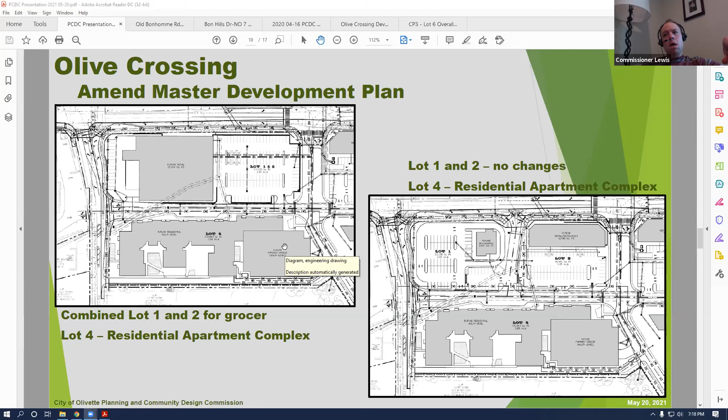Thank you, Carlos. I'm curious, obviously this was a year ago when we discussed this, but I thought the office building initially had a grocer at the bottom, and then it got modified away from grocer to just office building, if I'm correct. I want to validate that. Second, I'm curious how far the process has gone with the neighbors, because one of the concerns people had before was views into yards and things like that. One argument was that since it's an office building, people aren't there at night, but now if it's residential, that changes. I'm also curious whether this revisits some of the traffic concerns that existed before.

I don't know if it's better or worse, to be honest, with people now maybe leaving in the morning, coming back at night, versus the flip of that. So maybe it's six and a half dozen, but it impacts the weekends more. Sorry, I have a litany of questions there.

No, all good. If I can summarize: one was the original components of lot 4 did include the potential for a commercial component on that lower level. It was illustrated, as posted on the screen, that they would continue to seek if on that lower level they could secure a grocer, and that within that configuration there would be that flexibility. So you are correct, it wasn't that there would be two different options, but that within that original plan there would be enough flexibility to incorporate a grocer if the developer could pursue one.

The second is discussions with the neighbors regarding the change in use, the office building being somewhat limited from daylight times, to residential now having a more expanded timeframe. I'll let the developer address that aspect. For us, that's what this current process is about. Notifications have been sent out, and we are having our first meeting or discussion.

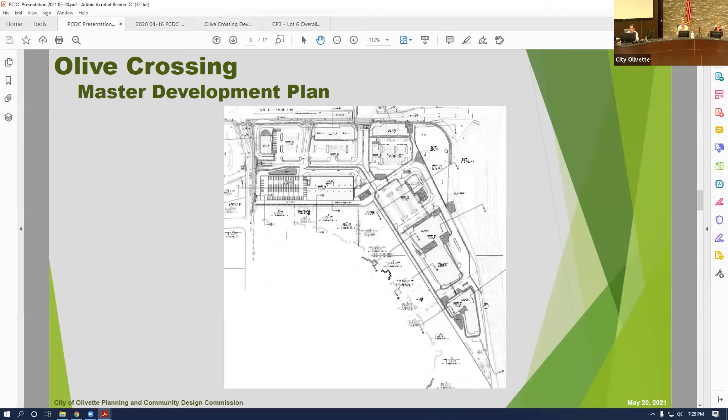This is part of the process as we learn through the PDD and the master development plan review. The footprint configuration of the buildings has changed from those in the original approval, but that's not necessarily inconsistent with the master plan.

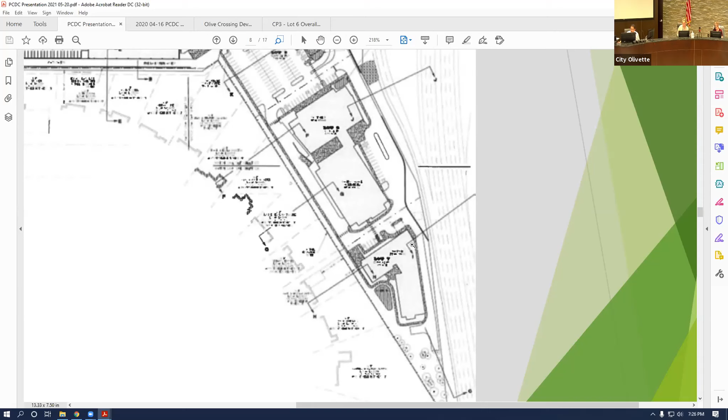These were meant to identify and illustrate the potential building masses, heights, and footprints. Lot 7, the hotel complex, had two components with two tenants, a southern and a northern area. The building in lot 6 had a drive-through that was removed, and the office building and parking structure were shifted northward in the revised plan.

Is the parking structure changing in height or size? It looks like it's getting wider. It probably is getting wider in footprint, yes. Is that because of the loss of parking in front along this area, as some of the public spaces got redefined? Yes.

Has there been any other changes related to the public spaces? Yes, we'll see those when the petitioner presents. They're more three-dimensional, with vignettes to articulate what those spaces are. The adopting ordinance designated these areas as enhanced public spaces, but the vignettes themselves were not incorporated into the ordinance.

If there are no other questions or comments at this time, I think we should bring on the developer.

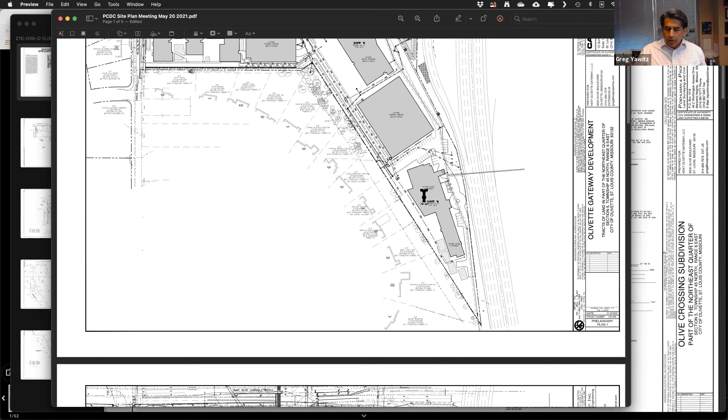So to keep with that, we held that. But really, to focus on the more significant change, I think, which is the residential building. Some of the questions I heard talk about the view and the massing.

And the use. On the use, yes, we had originally contemplated this potentially for retail on the first floor. It's not going to work out that way. It's not ideal for retail that far back.

But what we've done in the creation of this plan, which we'll be bringing forward after this next step, first will be the Lot 4 plan, is address things we heard from the Planning Commission in years past that they thought we should change. Number one, the garage used to be on the Price Road side. There was feedback, I think from Mr. Saunders, that it would really be better design-wise if that garage was flipped to the internal side. So you see that's been done. That's the box right here.

The other thing we're able to do, even though we have residential next to residential, is cut the building up. And if you see this inverted E shape, that gives us the ability to honor the request that this particular building be no closer than 30 feet. While this leg and this leg are 30, everything else is significantly farther away.

So we pulled the building away from the residence, which I can show you in a rendering in a second. Also recall that the elevation, the first floor elevation of this building, in this courtyard for example, is upwards of 12 feet below the property line here. And on top of that property line, we've already agreed to add an 8-foot fence.

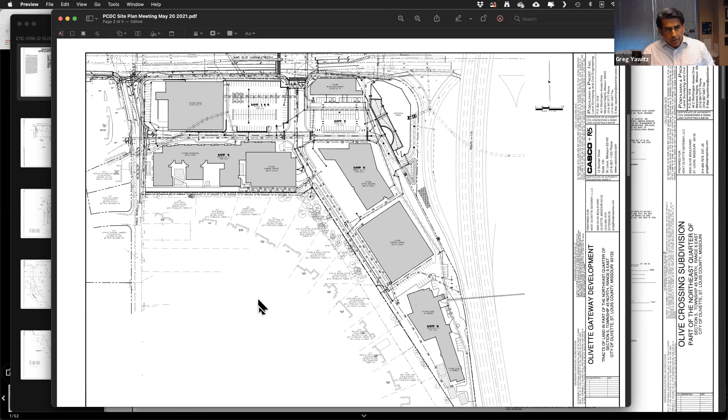The parking garage, what we're doing there is adding about an extra 50 spaces over the minimum required for the apartment building, so that it all contains within our height restriction, giving us that communal parking for the development. So if we get the steakhouse we're hoping to get on the end cap of this office building, you could have valet parking, with valets running cars into the garage instead of overtaking the surface lots.

Heights. Currently our height limit on lot 4 is 64 feet. Based on where we are in schematic design, it'll be below that. I can't tell you the exact height yet, but I can guarantee it will be 64 feet or less. We've done preliminary work on the hotel height too, and I believe we'll come in 6 to 8 feet below that height, but we haven't had the architects design it yet since we're not ready to build it. So I'm not 100% sure where that'll be, other than 100% sure it'll be 64 feet or less.

What else did I see? Oh, let's talk about public spaces. We are in the midst of refining public spaces as we can. Let me zoom in here.

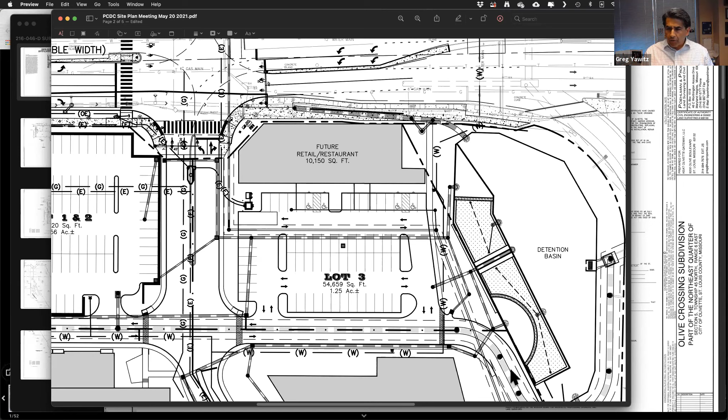I'm going to show you in a minute a graphical 3D representation of this very large public space area, which connects us to the Centennial Greenway, where we'll have a row of fountains set into our detention system for a visual, aesthetic element, along with a series of concrete benches and trees, not yet specifically designed until we do lot 3. I envision this area as a place for public outdoor gatherings and concerts.

As we refine lot 4, which I hope to bring you in the next couple of weeks, we're looking at this concept of nodes, where neighbors can stop while walking and talk. We're trying to come up with a very cool, functional area to possibly sit and congregate around the entry to the apartment building, a rendering which I can show you.

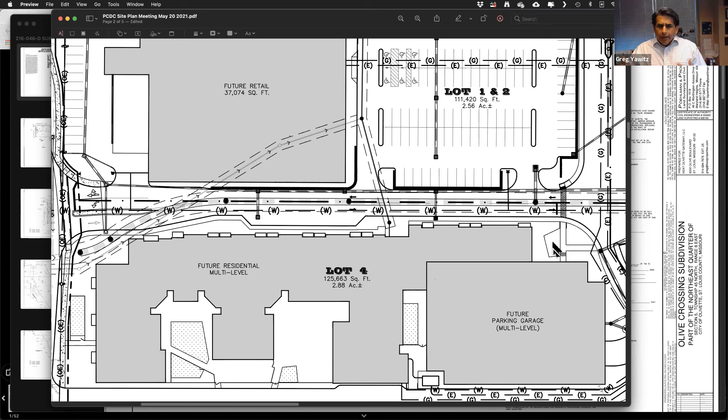This is all green space on the west side, including a dog park. And then this node in this area gets changed. This was going to be a walkway straight into the garage, but due to the grades, it's actually going to come in on the side, and we're going to create some sort of feature here. Again, people can stop and talk, there'll be benches, decorative lighting, things like that.

Again, we haven't fully refined the site plan for every one of the lots. Right now we're focusing on the conceptual master plan for tonight and the plat while we finish the refinement of the design of lot 4.

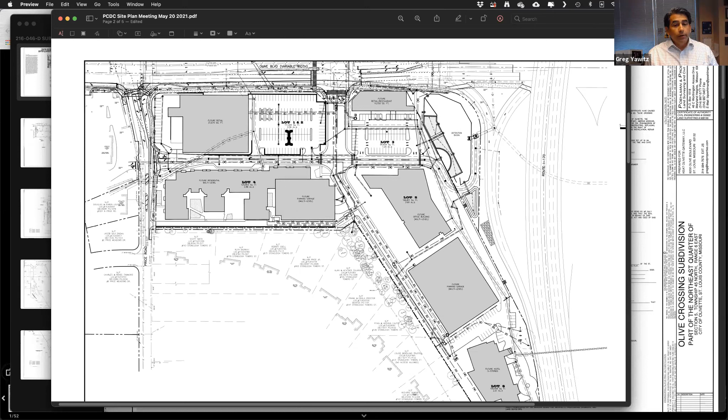I'll stop there. Roughly speaking, if you walked within the development without doubling back in any one spot, we will be over a mile of sidewalk, if my calculations are correct, within the development. That includes the sidewalk along Olive, which will be 12 feet wide from the east end of our project to Hilltop, and 8 feet wide from Hilltop to Price.

Last thing, since new things have been happening every day, we are changing the road name on the south. It's currently Collingwood, and we're going to make it Hilltop all the way down and through and straight back. Then the east-west road that runs around and in front of the office building will be Olive Crossing. That was approved and addressed by the county last week.

So with that, before I get to renderings, I'd love to answer any questions if you have any.

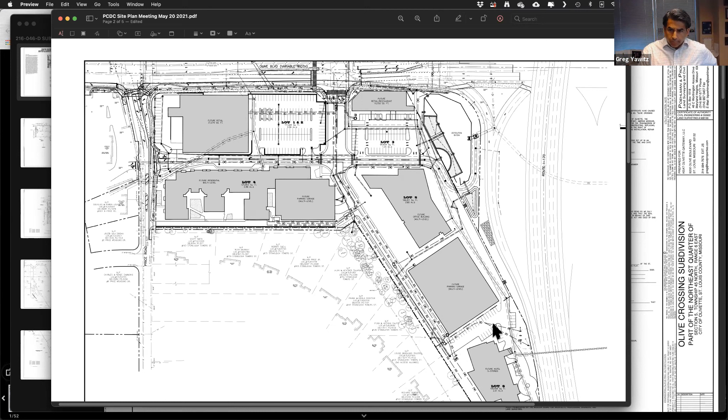I think we should probably see the renderings as well, and then get a better feel.

I am curious about those businesses you actually have secured already. I thought the hotel was one. If you can tell us if there's any others you can share without leaking anything.

Sure. So other than the hotel, the answer is no. Let's go back to the difference between here and here, right? I have someone who has a very firm offer that I have not signed for this. The reason I have not signed the offer for this is because I want this.

This will not surprise you. This looks a lot like a building that would house a business that predominantly sells food, like a grocery store. So as much as I really like the food these people sell, I think our community would rather have this use. So I'm dragging my feet because I'm trying to lock one of these down, because that's the direction I've heard for 20 years in Olivette - we've got to get a grocery back, and I take it as my personal mission to try to do that. If all else fails, I feel like this is a good option. Whether this building ends up this big or slightly smaller, I told my civil engineer to make it as big as you think is logical for this site.

As it relates to the hotel, my partner and I are actually the franchisee. So it's a 160 room dual brand Marriott - 80 rooms of Marriott Courtyard and 80 rooms of Element by Westin, which we will combine. There'll be 2 lobbies. Let me scroll down here.

So the building will be entered - there are things I do know. This is the Courtyard canopy and entry, and this is the Element entry. The hotel rooms are in the straight up and down part, this whole section over here.

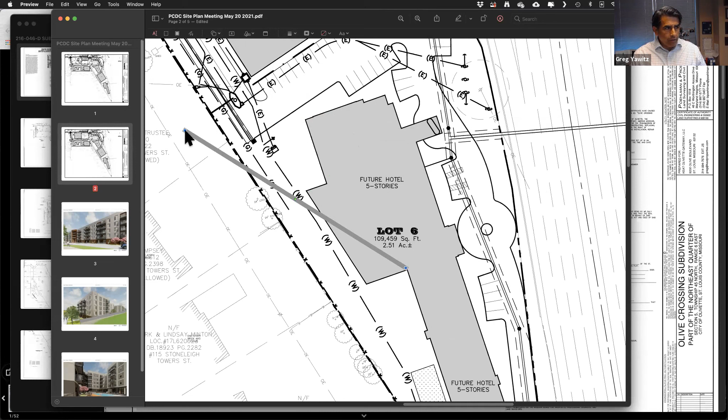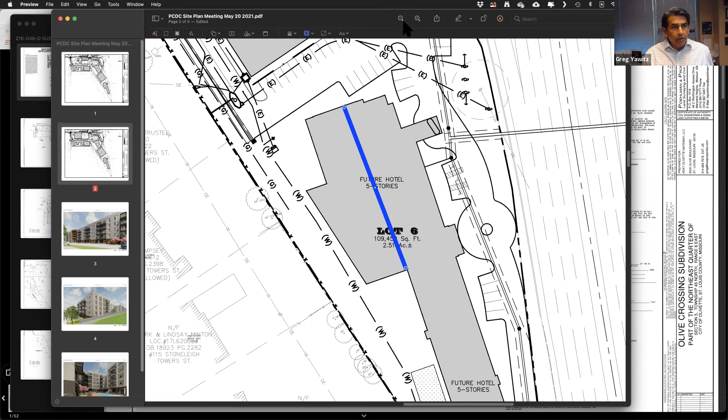Just to give you an understanding, everything roughly to the left of this line - let me make it a better color - everything here is one story. The rooms are all in the main wing. We are signed franchisees, and Marriott's request, among others, is that we not open the hotel until the office building is closed in and the parking garage is built. They don't want customers driving past construction and risking popping tires. Does that answer the question?

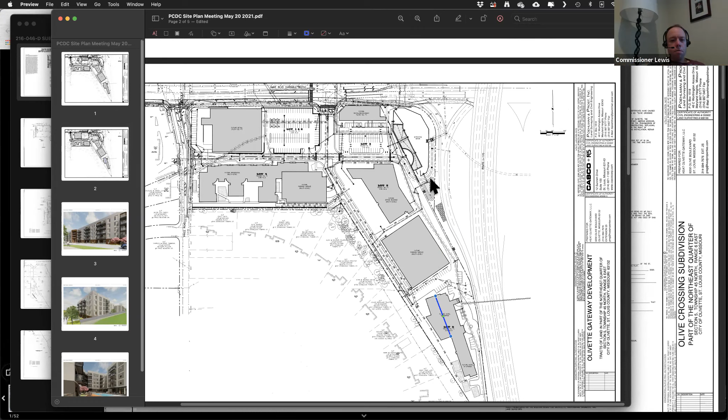Yep, thank you, perfect. All right, so first I want to show you where we currently are in the progress of the look of the apartment building. We're still working on a name right now - I think the marketing team has called it The Res at Olive Crossing.

I just want to give you a feel of what we're looking for here - I don't want to call it flash, I want to call it definition. I want to call it presence, sense of place. You know where the entry to this building is.

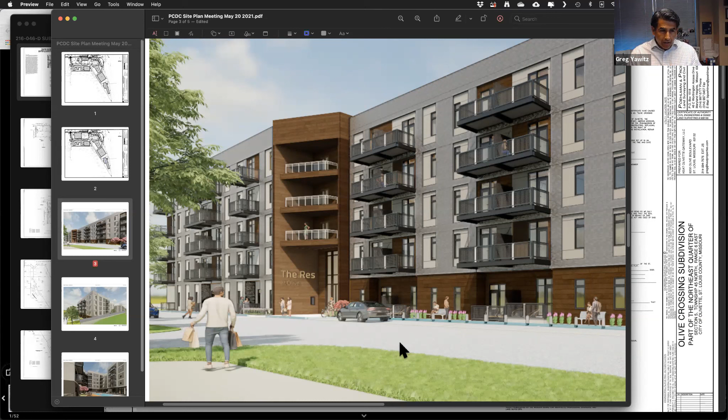So we're talking about a mix of materials, all of which I believe are permitted by code. This wood look material is a Nichiha panel, and we're still playing with it - we probably have 8 different versions. We're trying to settle on one, which I'll have by the time I present it to you. But giving the building a very calming feel, a big sense of place, so I'm not confused when I pull up to this building where I enter and where the lobbies are inside. And then as you can see on the front, we'll have balconies.

Let me zoom out here. Here's a view - oops, Bob left these on. My architect just sent me these. These balconies are gone, I don't know why he sent these to me, but I just got these an hour ago because we're playing with different models. Imagine these are gone, because they will be.

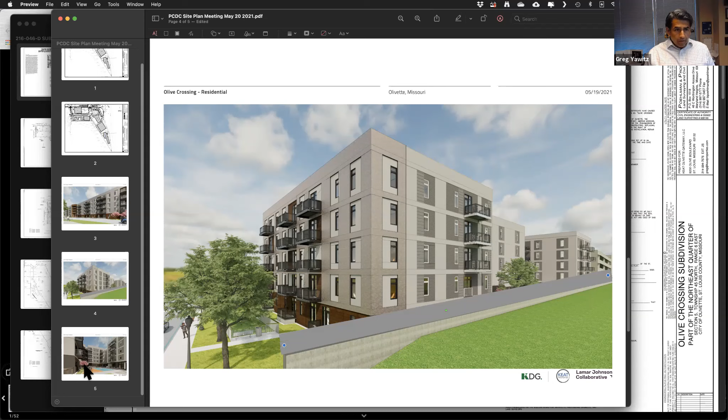But here's a side view, and he didn't draw this in - I'll try to give you a feel for it. This is the retaining wall where the elevation of the building drops, and on top of that retaining wall will be the 8 feet. I don't have a scalable drawing to add it, but for reference, we still plan to honor that requirement and agreement with the neighbors where the code allows 6 feet, but we're going to go to 8 feet. Again, this keeps anybody from seeing anything going on the first or second floor of the building. And then just to give you a feel of where our current concept is for the courtyard space.

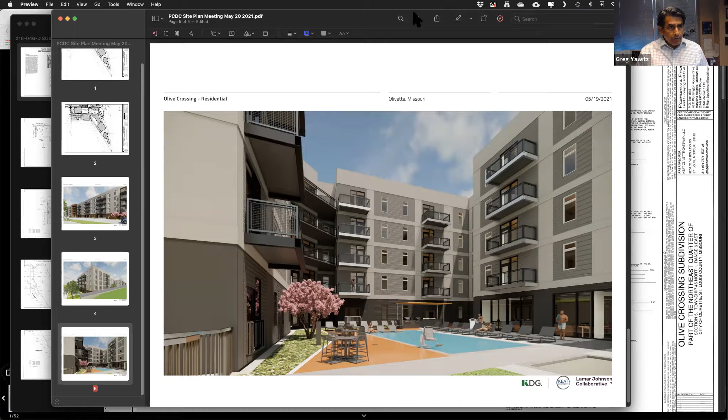Let me show you something else.

Now, what you'll notice when I show you is that the colors of the residential building are different, because what I just showed you is newer than what was done a few weeks ago.

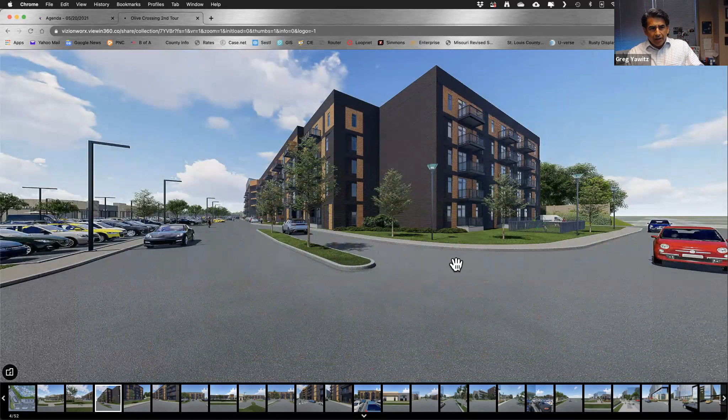So this is the site plan. The hotel's up at the top, it's inverted. The grades aren't fully accurate to scale yet because we're still finishing some of the civil design for the building, but this will give you a feel for the 3D world.

Sidewalks on both sides of the street, clean lines, rich looking materials, decorative lighting fixtures.

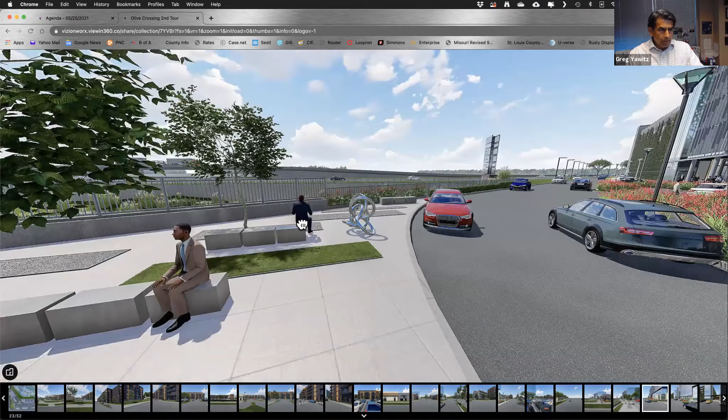And then when it comes to the public space, this is the concept we're going with. We've got this railing here, which will have the fountain behind it, but then a place for people to congregate, sit, bring their lunch if they work in the office building, outdoor live music, things like that.

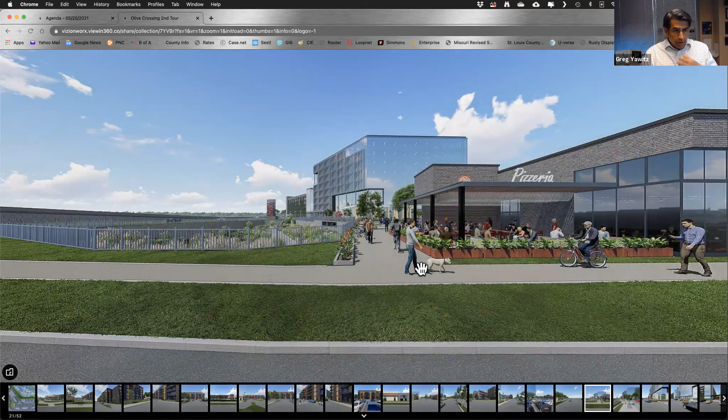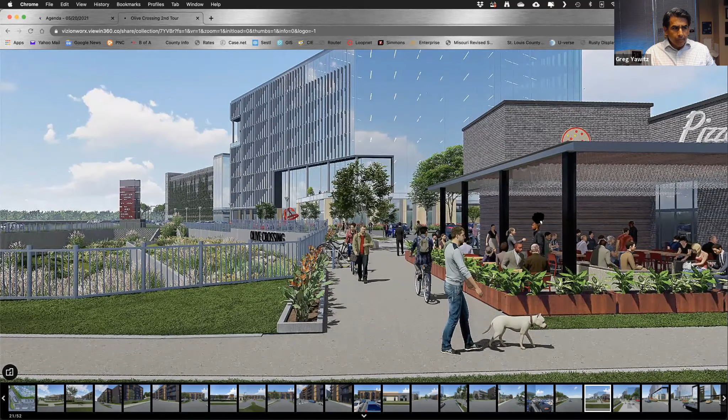Give you another view from here. As I mentioned, we connect to the Centennial Greenway, so we've created an extra wide path in, and we're concepting a whole bank of bike racks, outdoor dining, the canopy concept for outdoor dining at the restaurant — again, haven't set the materials. This is the concept on this retail building on the front.

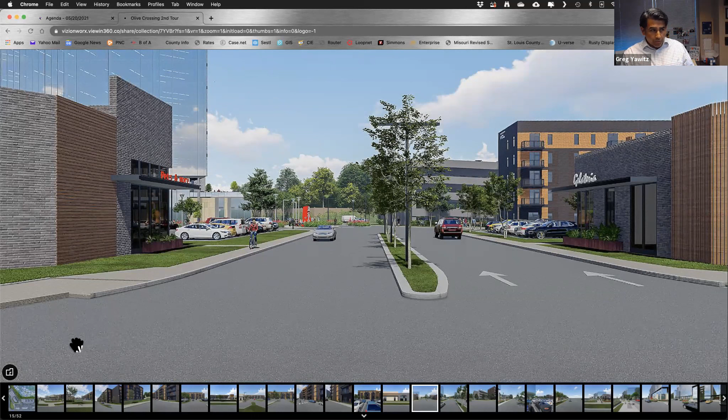Let's see. Just a look as you drive into the development, just trying to evolve this as we go. Some of these colors and images are upwards of 3 years old. We just haven't gotten to each one of the lots yet.

But really, if you trace where my hand's moving, the length of this sidewalk brings you all the way around the property. We've tried to minimize the crossings so you can get from one side to the other.

If you come down Price, for example, you can walk all the way across here, cross once, then cross a second time, and now you're all the way either in the public space or you can get on the Centennial Greenway. So we're trying to be as thoughtful as possible about minimizing pedestrian crossings.

Over the years, for those who've been on for a while, if you remember, the intersection here was never really that clean. We've cleaned all that up, just trying to make things sensible.

As a reminder, the road behind the residential building is for Ameren to service the power lines on top of the hill, but it's one way out only. So we will not be taking traffic in here. This will be an exit only that may be gated off and required to be manually opened.

And then I want to show you — so I mentioned the steakhouse concept. What we're talking about with the office building is creating a space for restaurants and outdoor seating and outdoor gathering, above and beyond what you might normally see.

Again, haven't fully refined it. Potential for outdoor seating, for a cafeteria, for the office tenant up on the second floor here. We're looking at things like green roofing options. We're just, as we go, we'll develop the specifics.

So yeah, I think hopefully that answers the questions about public spaces. And as we develop these two lots, depending on how that ends up shaking out, we'll do that.

The lot 5 is pretty thought out — this big public space here, some space along the north side, a large public space and walkways here, and then the connectivity within the sidewalks.

Can you show us some of the views of the — oh, behind that potential food retail. You mean here? No, go to the northwest. Here. Right. Yeah. Oh, so if this was the plan versus the grocer?

Right. Oh, I thought you had the grocery store already included. No, we haven't 3D modeled that yet because I don't have anybody locked in to model it. I'm trying to actually do that as we speak. I may have a new model for that in the 3D in about 2 weeks based on some stuff that happened yesterday. So in this case, you would just see the building move farther to the east to allow for the trucks to get in, which we would screen, and the retail building would actually face east toward the entry.

The only concern I'd have is, usually the back of these stores are never kept up real clean or nice, and that's kind of a main focal point right at that main intersection. So I'm just curious how you're proposing to address that.

So how we'd address that — let me go back and show you, hold on. Let me go back to... where the hell's the PDF? Hold on, let me find it.

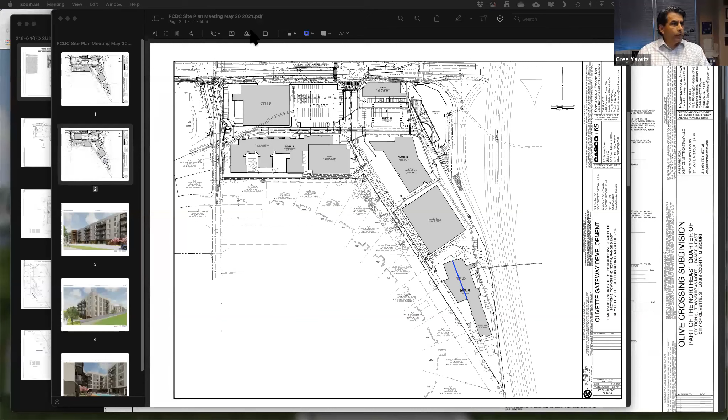So in the event this were the configuration, from about here - this entire line would be heavily screened. The elevation of this area would be below the sidewalk, estimated to be upwards of 5 feet below grade, and we'll screen the entire perimeter because you have to get deliveries.

I don't think we want deliveries facing the apartment building, and I don't think we want deliveries facing Olive. We can hide them a lot better in this area with fencing and screening between the sidewalk and the paved area. So that's our plan. Once I have a user, which I hopefully will have soon, we'll design it and submit it for your consideration at that time.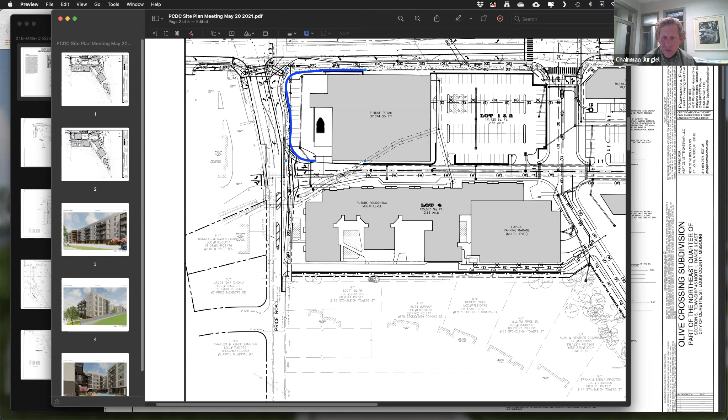Well, I am concerned about that, and I'm sure other commission members might have some other questions. Or do you have any more visual items, photos or renderings that you want to go through?

I think I covered - let's see if there was anything else. I showed you the 3 slides of the apartment, the 2 site plans, the 3D. I want to give you a feel on the 3D on something. Hold on, here we go.

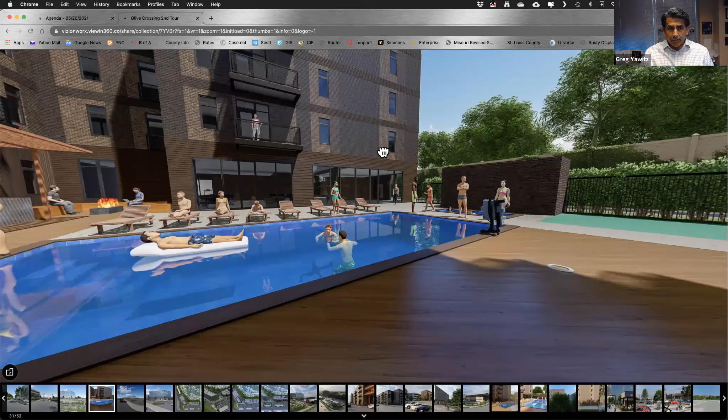So the way we've thought about the courtyard area - besides my earlier reference to a 6-foot tall person and the top of the wall being 20 feet - is we're placing a barrier of some probably brick structure between the pool. So you have the pool, the hot tub, and then what amounts to really a sound wall. It's tough because this is all digital, and this is not as high as it should be - this fence will actually be up here.

We are so far below the neighbors, and the homes are upwards of 150 feet from the property line that, laws of physics, sound can't go up, over, and around a fence. So we're going to be containing our activity below the grade, 150 feet or more away from our neighbors, and have instituted what will actually also be an impervious-to-sound surface aside from the 12-foot retaining wall and the 8-foot fence. So I just wanted to give you a sense that we're trying to be as thoughtful as we can with our neighbors about as many pieces of this design as possible.

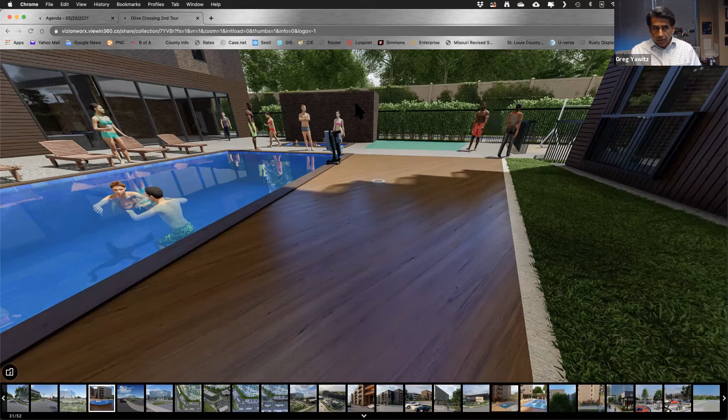And so that's why we chose to locate this here. So now I'm happy to answer any questions. Does anybody on commission have any questions or comments for Greg?

I got a couple, and I'll go ahead and start off. Do you have any new cross sections that show the view from the residents for this apartment building, just to get an idea of the impact of it?

Well, hold on, I think I might in my stills section. Hold on, I think. Yeah, okay, let me reshare again.

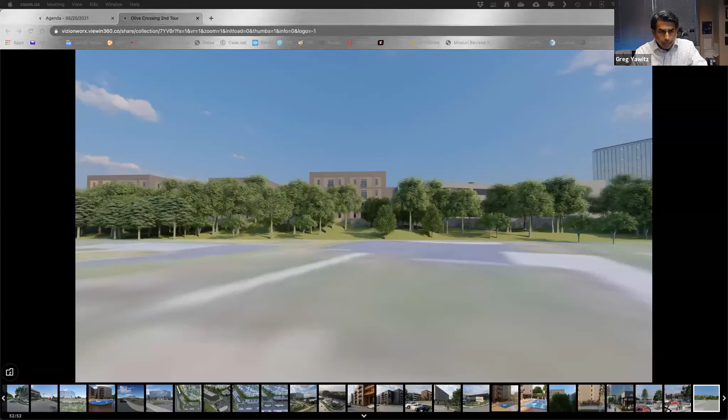All right, so Andre, my 3D guy, has taken the topography from the available USGS maps. I can only zoom in so far, and he couldn't really render the people's houses, so he just took the grades.

But what you see is most all the neighbors from Stony Side have a dense tree canopy on their northern side, which sits between their homes and the building. So what you'll see are broken up sections. If you're in their backyard, first of all, you have to look over an 8-foot fence, so they're going to have to look up at any part of the building, unless they are on a second floor of a home.

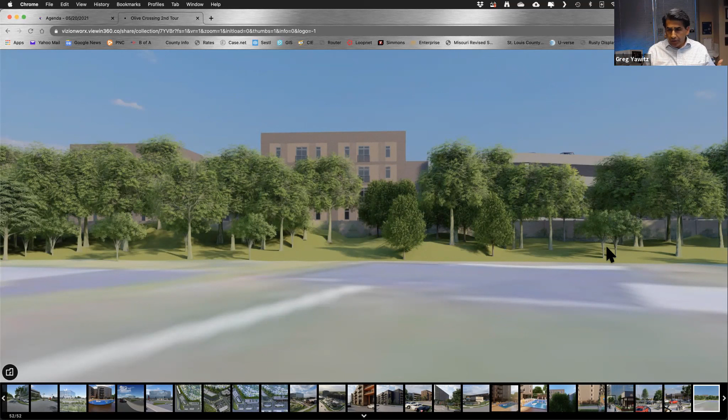And I have that with my neighbors - I have a second floor of my house. My neighbor's house actually sits 8 feet lower than mine, and so I can see over the top of their house. So this is an extra floor or two above that. But again, we're minimizing it so that there are windows, and we're eliminating balconies on the south side for that specific reason.

Where would the houses be approximately - is that what the gray spots are? Yeah, exactly, this is the footprint of a house. So we're looking really through at one point, so we're kind of at the front yard. Yeah, I'd say you're about the front of a house.

Could you zoom in to get back to where the back of the yard would be? This is as far as the zoom lets me go - I'm scrolling my mouse and it's not moving any farther.

I mean, I can show you here. Let me go back to this. So, just to give you an idea, everything's going on here. You're looking at blocks about a story and a half at grade.

But when we bring in this specific building for review, I'll bring in cross sections once we've got the height set, laid out relative to the distance to the back doors, standard 6-foot height person, things like that. I'm also not an acoustics engineer, but I'm wondering about the potential echoing effect with that apartment building and the walls.

Well, and I think you addressed it, but I think it'll be interesting to hear from the neighbors. It does change things now that it's a weekend activity when people are out in the pool during the day and there's noise. I don't know acoustics well enough to know if 150 feet and a wall can carry sound or not, but I'd be curious if the city can look at anything like that.

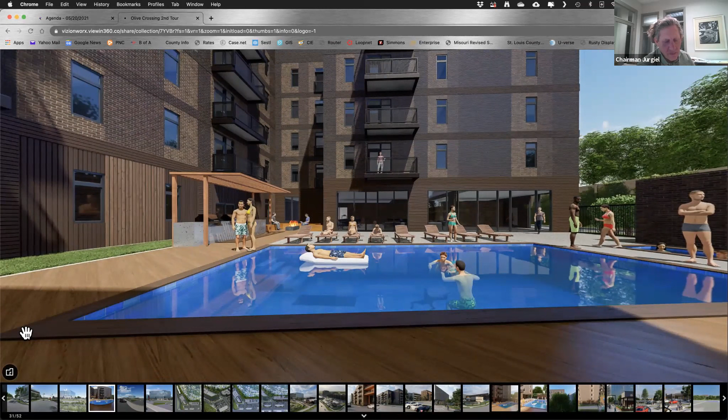Can you pull up the view of the backside of that apartment building? I guess the southern view of it. I'd love to see an elevation view of that building, so I can see what the parking garage is going to look like as well. Oh, all right, so the parking garage, let's go over here.

So it's a precast garage, probably 4 levels, all grade and up. It'll have interior bike racks. We're going to have multi-port electric charging stations, things like that.

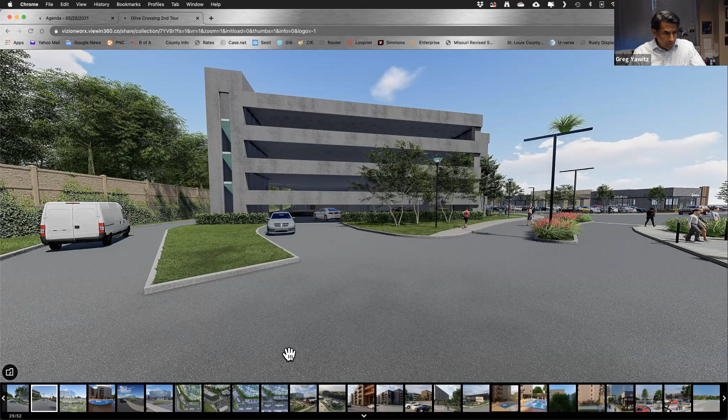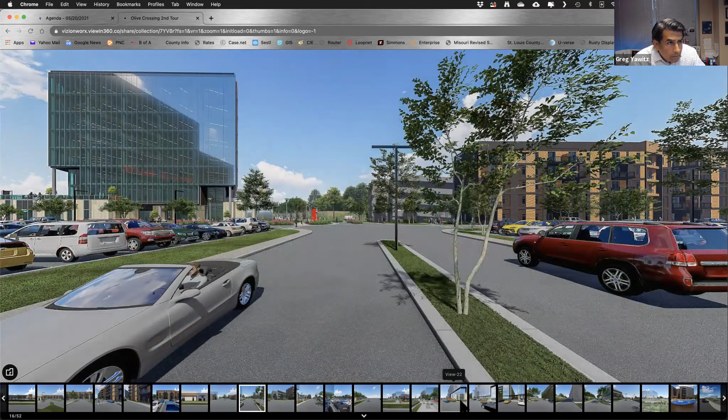Do you have a view of the south face? I don't think in this. Let me look, hold on. I'm looking at thumbnails, sorry. What's this? Nope, that's not it. It was up to Andre where he put these data points. Yeah, it doesn't look like I do.

I mean, effectively it's going to be a parking garage. It's gray, it's concrete. So the look we're seeing right here is going to be the same as what we'll see on the south face. Pretty much, yeah. I'll get you a more photorealistic, accurate one once our architect renders the actual building. Again, this is the old color scheme. But what I've told them is I want to tint the concrete a richer gray.

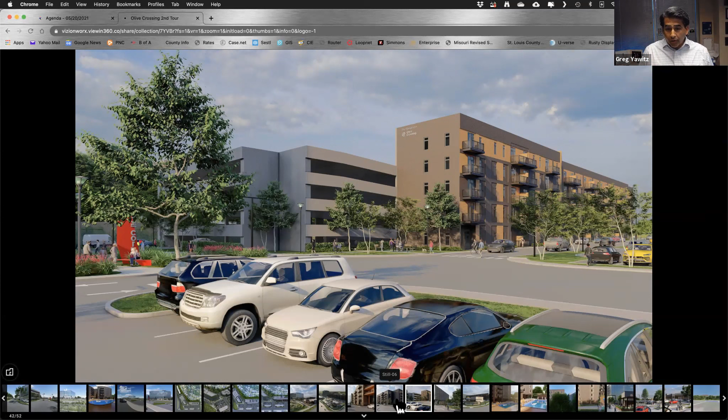And then it'll have interior LED lighting. Again, tonight's really about the overall plan, but know that we will have a foot candle study for every lot. We will not shed light onto our neighbors. Everything will be shadow boxed. It's all directionally controlled LED. The technology now is great, so it's not a question of if, it will just be done that way.

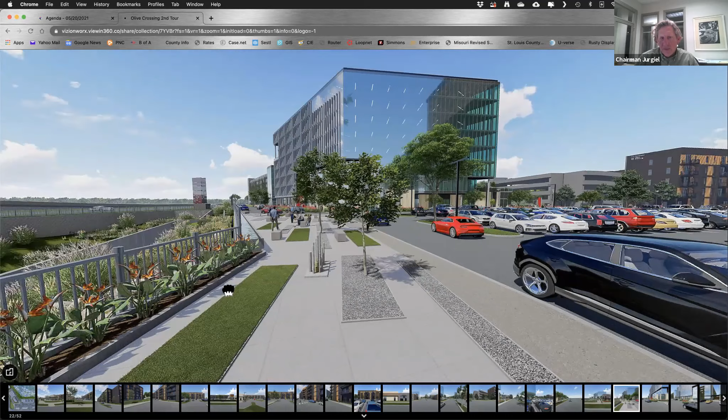Good. I think Carlos mentioned something that you had some diagrams or photos of more of those community spaces as well, and maybe some of the other nodes that you talked about.

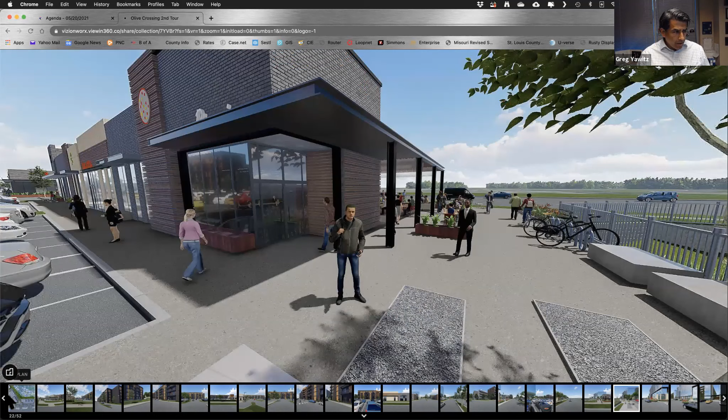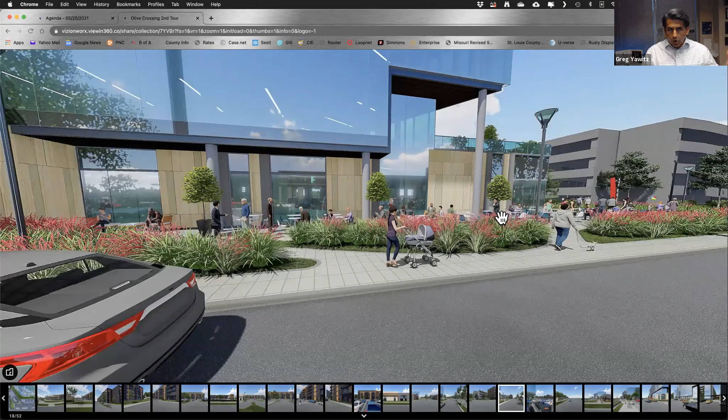No, this is the primary. So the two major nodes or community spaces are the east side along the basin that runs a couple hundred feet along the restaurant, again, the parking and for the bikes that we talked about, and seating and so forth. And then the north side of the office building, which really runs the entire north length of the building. So you can see, we haven't set these tables specifically in the plan or designed this building architecturally, but we're contemplating larger public spaces. And then the third one—

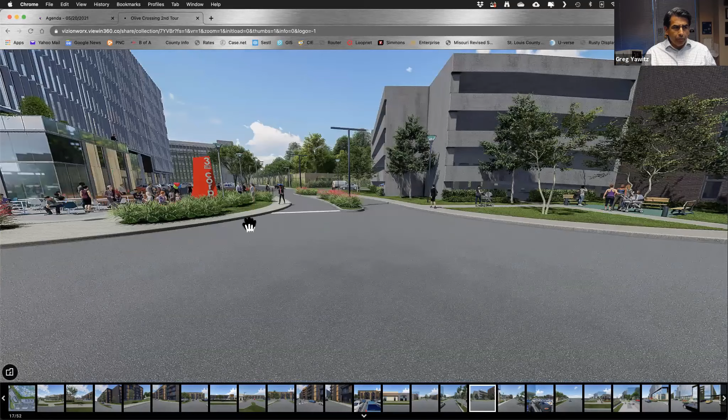Would those be public spaces or would those be spaces for the restaurant? So if they're tables for the restaurant, then they're for the restaurant. But again, it's kind of like here at Price Crossing—Fallon's has its tables, Sugar Fire has its tables, but when the restaurants are closed, they're public, anybody sits there. When Starbucks was open, people would grab their coffee and sit at a Sugar Fire table. So I'll call it quasi-public. The area by the fountain is fully public, other than the patio space.

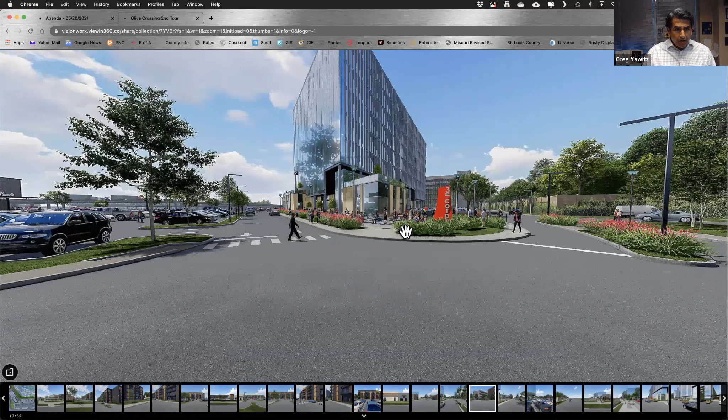And then we're working on, just to give you a concept of this node at this corner—this isn't right because there are some grading issues here, and this walkway actually goes away because of the grade, so you come around this way.

But we're talking about that sort of collector space, where the mom and the two moms with strollers stop, sit on a park bench, have a nice mocha latte and enjoy the weather. That's there because we're thinking about the commitments we've made to the city relative to making this a resident-friendly development, not resident-free. And we're going to have new residents of Olivette, which personally excites me - it's growth of our community. So we're looking at this from the standpoint of, if you're going to choose to live in our building, what are we providing you? Walkability to restaurants, hopefully a grocery store, access to the Centennial Greenway, places to walk or jog. If you can do a mile loop inside the development without ever leaving it, that's fabulous, because then you don't get onto Price or Olive.

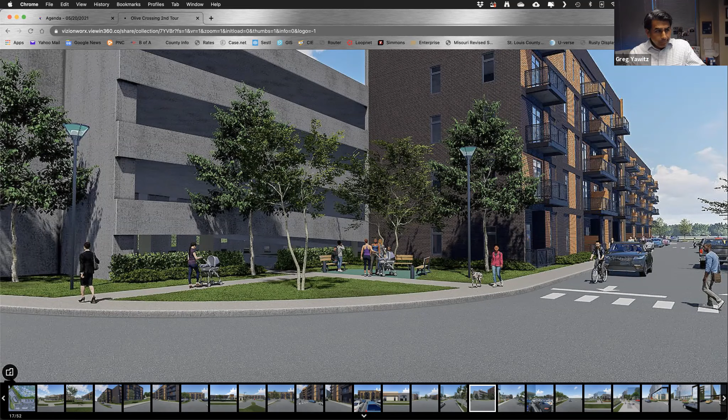Okay, does anybody else have any questions or comments for Greg at this time?

Okay, let's go ahead and maybe see if we have any public comments.

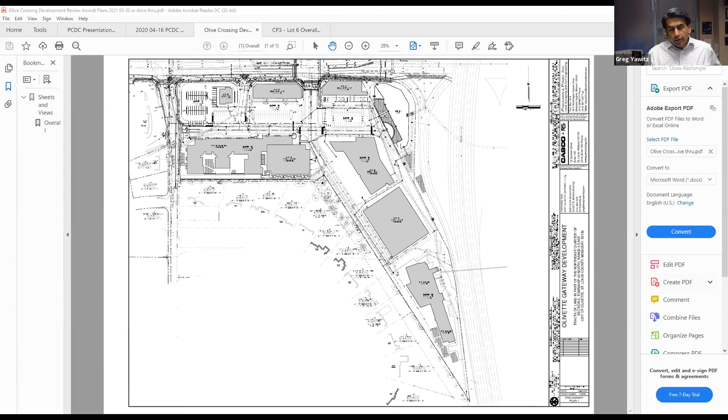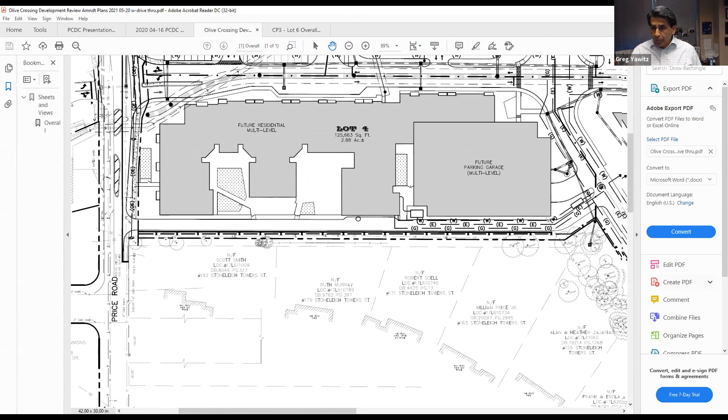The diagram I'm looking at sort of suggests that Locust Road would still remain. Is that true? No, Locust Lane would be vacated in the process. But it shows on the diagram that there's a drive back there - it looks like a road to me. Is that true or not? Mr. Smith, that's an access road mandated by Ameren so they can get their trucks back there to service the power poles, since the poles will be above the fence line. We have to put in a 15-foot wide lane there for Ameren and for fire access. It'll be one way, exit only, for service and deliveries only. It will not be available for use by the public.

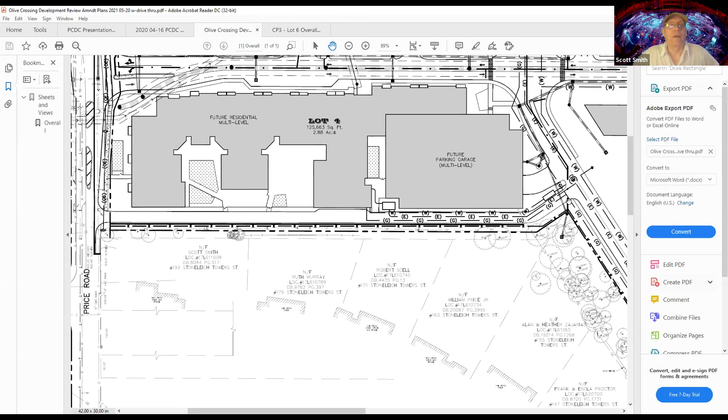I think there's a grade problem there when it exits onto Price Road, but I want to move on. This area where lot 4 is used to be residential - it's been residential for 90 years. When it got rezoned, the feeling is that it's all right to move development like this incredibly close to the neighbors' lots. I would prefer, and hope the commission would move the south face of these buildings, especially the western one, 30 feet north. It looks like there's some grass area where those dots are, and where the bottom part of the E is - if that could be moved north, I think it would make for a much better neighbor. In addition, I think this multi-story residential building would actually be much better if it was simply moved north to lots 1 and 2, with the potential of using what's claimed to be a grocery store on level 1 with retail. I'd also recommend adding 1, 2, or 3 additional stories vertically if you get it away from the neighbors - they aren't really too concerned about that distance, and it would give the developer more opportunity for more units. What could happen to lot 4 is the southern half could be planted with trees since it's rough, hilly terrain - you wouldn't have to excavate it. The northern part of lot 4 could be additional parking. Right now it looks like the plan requires trenching right at the southern property line, which will kill all the trees along that easement and on our property, which I object to.

Okay, thank you, Mr. Smith, I appreciate your comments. And one more question - I would like to submit a document, more technical, regarding the damage to the trees. Can I send that to Carlos? That'd be great, as part of this. Yeah, Carlos, would that be all right? Absolutely, sir, I believe you have my email. Yeah, I can get that to you, Carlos, I'll do that later tonight. Thank you, good, good. Thank you, sir.

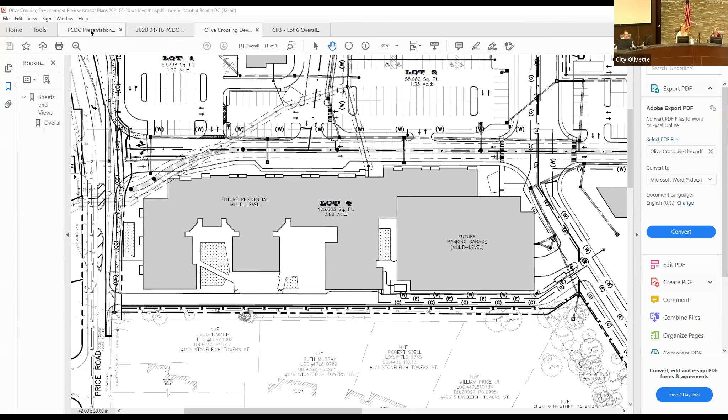All right, I guess, do I hear a motion at this point? Mr. Chairman, go ahead, Carol. I'd like to make a motion. Carlos, I do want to check something on Exhibit B1. Does that authorize the options, or is the developer going to have to come back?

No, that would authorize these two scenarios within the master development plan. Now, whether it's lot 1 and 2, or lot 1, or lot 2 or lot 4, each one of those individually is going to have to come back to the commission for a community design review, what we call the design review process. Is that what you were asking? Yes. Okay, thank you.

Mr. Chairman, I'd like to motion to forward a recommendation to the City Council to amend ordinance number 2675 so as to replace the existing master development plan under existing B1 with the revised master development plan authorizing multifamily residential on lot 4 as presented before the commission, per the staff memorandum dated May 20, 2021, subject to any additional conditions approved by the commission.

I second. Motion's been made by Carol Wagner and seconded by Tim Spiegelglass. Carlos, please call the roll call vote. Commissioner Spiegelglass, Approved. Commissioner Lewis, Approve. Commissioner Rich, Approved. Commissioner Wagner, Yes. Chairman Jurgel, Approved. Passes unanimously. Again, the next step in this process is, this is a recommendation. This recommendation would then be forwarded for consideration by the city council. Not sure what the June schedule dates are set, but it would be scheduled for a June meeting.

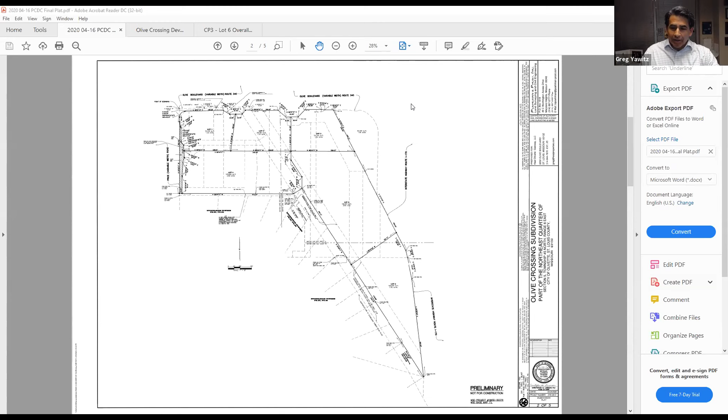It's preliminary until you vote on it, then it's final. There you go, I didn't realize that's how it went. Once it becomes a Mylar and I sign it and the city signs it and we record it, then it's done. Right, and you can sign it, Rob.

Mr. Chairman. Yeah, go ahead, Carol. I would like to go ahead and make the motion. That'd be great. I'd like to motion to forward a recommendation to the city council to approve a 6-lot subdivision to be known as Olive Crossing subdivision, as presented before the commission and per the staff memorandum dated May 20, 2021, subject to conditions approved by the commission.

Motion's been made by Carol Wagner. Do I hear a second? Second. And seconded by Brian Lewis. All right, Carlos, please call the roll call vote.

Commissioner Spiegelglass, approved. Commissioner Lewis, approved. Commissioner Rich, approved. Commissioner Wagner, yes. Chairman Jurgel, approved. The motion passes unanimously. The final subdivision plat is also an item that will go for final action by the city council.

Okay, good. All right, thanks, Greg. Thanks, everybody, I appreciate your time. Have a good evening, and I'll be back soon and many times coming up in the next 6 to 9 months, with all kinds of cool stuff to show you. All right, good, we look forward to it.

Okay, we'll move on to item D, text amendment, chapter 422, stormwater management, article 4, review and approval, section 422.080, single family residential development. Petition type is a text amendment in consideration of changes to new single family residential development detention requirements for subdivisions. The petitioner is the city of Olivette. Property owner is the city of Olivette.

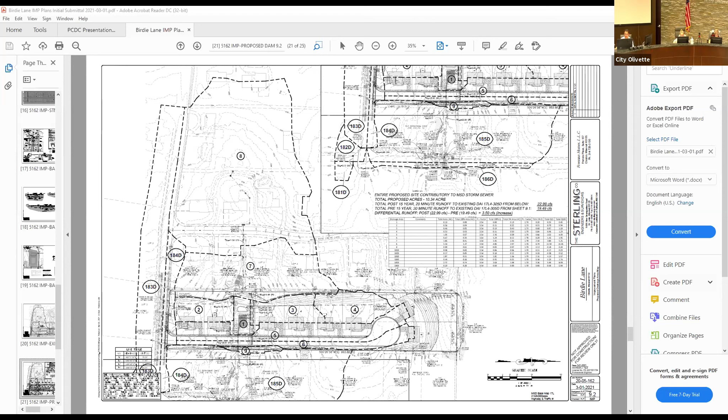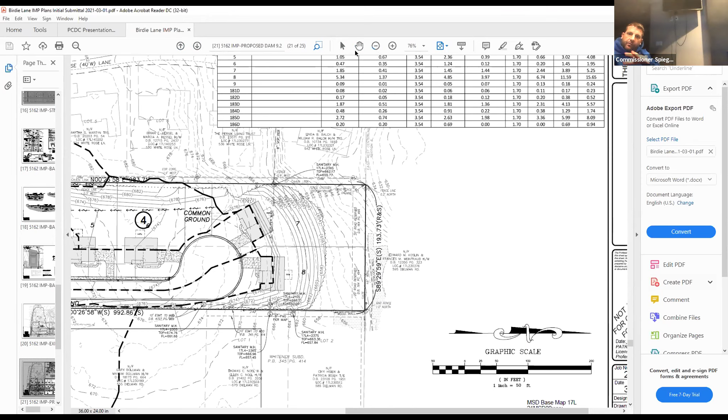The only exception would be at the far end, the most northern point of the property, where they plan to provide that undisturbed buffer in their area. It's a good question, but most of... Well, I agree it's probably not on this subdivision so much, but in a different scenario, could that be part of this? Yes. Well, but it's considering the surface area of...

It's a good question, because that's where we're having difficulty trying to handle the stormwater runoff that happens on the surface. We're really good at capturing stormwater from the built environment, specifically the houses and streets when they have curbs. And so I think your issue is more about the grading and how those areas are graded.

And those are done on a case-by-case basis. Because in theory, the homes on Birdie Lane will drain into a swale system that gets diverted to the common ground detention system. The runoff from the homes on White Rose will go into the backyards, into the Birdie Lane subdivision, and ultimately get caught into the same topography that leads into the common ground. So at that point, not only do I have the Birdie Lane runoff, but I'd be capturing the neighboring subdivision runoff into one system. Is that what you're asking?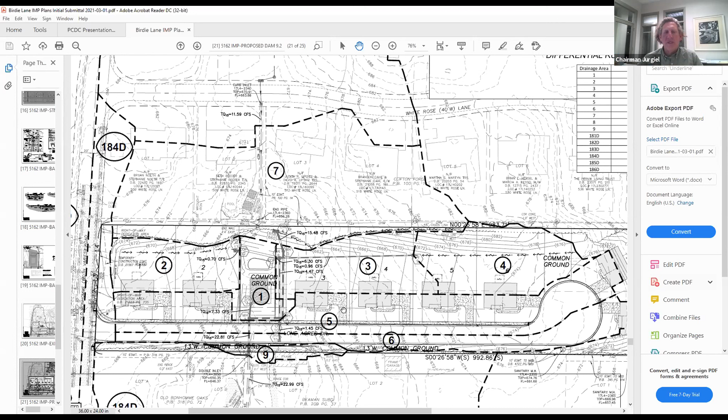Carlos, can you explain - let's see, I'm trying to, assuming that how MSD calculates the amount of water is similar to how we calculate the amount of water. It sounds like we already have that roof area, the gutters.

Will those gutters actually be directed into the retaining system? They are, through the topography or the finished grades that are proposed. So as it follows through, they are picked up by the swales that are shown and such. That's different than under the current chapter 422, where it is specifically piped in directly into the detention basin. Here, there will be both a combination of pipes and stormwater controlled above grade, on grade.

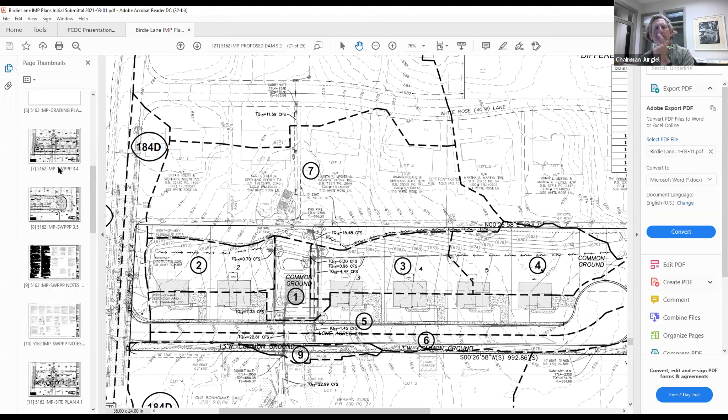Oh okay, is that right? For some reason I was thinking it was going to be hard piped into it, but I guess I was wrong. Mr. Chairman? Go ahead, Carol.

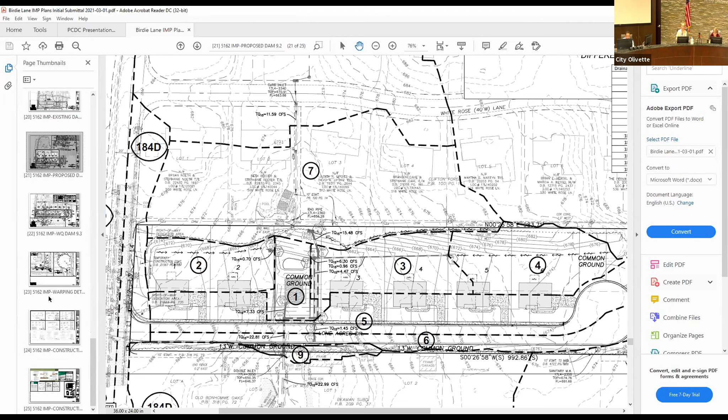Carlos, when MSD does its calculations based on these concepts, and then sizes how much detention the overall subdivision requires, is there a way for them to provide to us their calculations per house? So in other words, if someone comes in and wants to build a house twice as big, or whatever, more impervious surface, we know that the subdivision's detention is based on a house of this size, and this is exceeding that, therefore it would require additional detention to make the whole system work. Is there a way that we can back into that number?

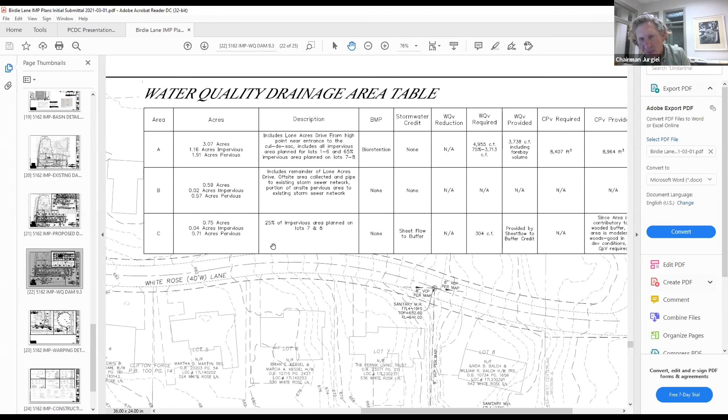Not sure, it'd be more of an engineering question. We can check with them. Carlos, I think you already said that they took the average size of the house and factored that in. So if we looked at what that average square footage is and took an average of what the driveway space would be, that way if they do anything different, we'll know what that delta would be.

Yeah, that's true. But I am curious, could we require them to provide additional drainage retention on site above the concepts that MSD did their calculations for? Yeah.

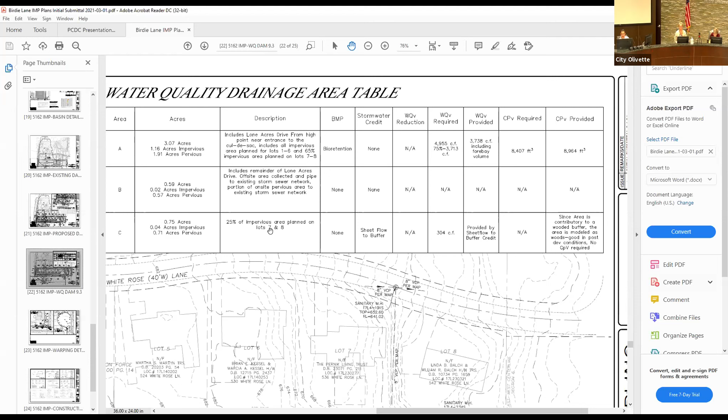Well, based on what I've heard of the questions, there are several questions that are beyond my expertise to try to respond to or address. I think it would be good for the developer to have one of their engineers talk about that.

But I think we're kind of zeroing in on some potential solutions - looking at whatever was originally proposed versus what was actually being built, and then if there's anything significantly different or higher, potentially having that be retained on the individual property. The only question I have, and it's about what Tim was mentioning, is...

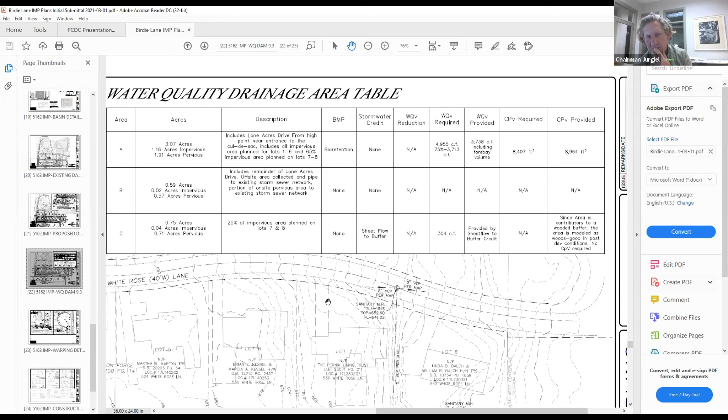gradings can potentially change, especially with landscaping. So is there a way to make sure that if they have a whole system designed like this, they can't change the landscaping or the grounds to interfere with the design of the system? Does that make sense? Yes, and it's a difficult one to control, but we can take a look into it.

I don't have a simple solution other than just not to allow it. It's difficult to explain to a property owner that they can't mess with the grades, for lack of a better way to say it. And even for some of the smallest things, it can have unintentional consequences - one pool can create a domino effect on one end. But that's why we have the subsequent review processes, hoping that when we do the reviews, we're looking at what was initially intended, what is proposed, and making sure the system still works.

But somebody trying to flatten out a yard or create a play area or garden can easily unintentionally alter the pattern. Even if we placed it in an easement, it's still not visible when you're physically out there moving dirt around. Right.

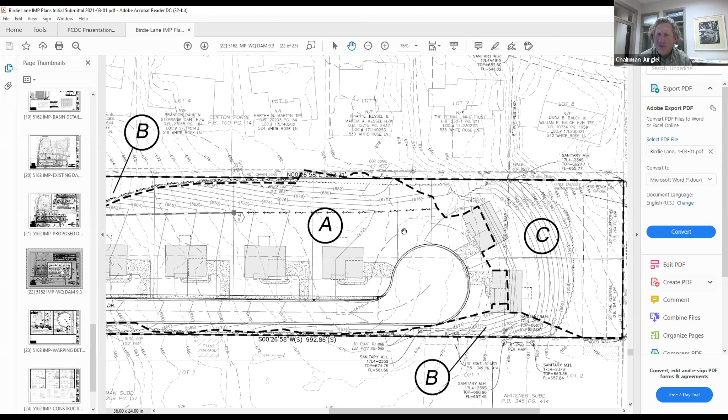Okay. So I think we'll have some further discussions later, maybe when we can bring on some additional experts and kind of confirm those MSD calculations.

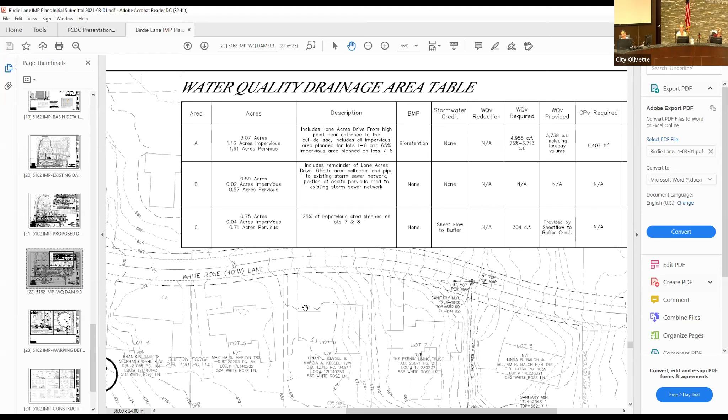Okay, so do you want to have any more discussion, or do you think we hit on everything we can tonight? No, I will talk to the developer. I think it would be worthwhile - we'll have the video posted on the city's YouTube channel for them to take a look, get a gauge of what type of questions the commission's asking, some of the concerns, and then look at their thoughts. It may narrow it down to one option coming back to the commission instead of the three.

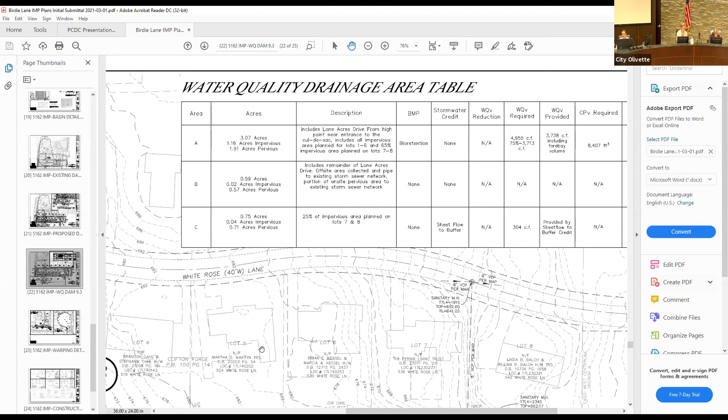I kind of wonder too, if there's any way they can incorporate maintaining this drainage system in their subdivision indentures as well, if there's a way they can help ensure the subdivision-wide system works. Just like we can't necessarily dam up a creek. Go ahead, Tim, I saw you got a hand raised.

I just wanted to go back to what you said, Rob, as well. Just so we're clear, before - like when I built my house, I had to take all my water coming off my roof and direct it right into a drain line and get it away from my house into a proper place.

If we do this, it sounds like we're letting them basically take all their roof water and get it into the swale and bring it on the surface the whole entire way through it. I personally do not think that is a good idea for what we've discussed in Olivette and how bad our rainwater is. I would like to see more control on that individual site instead of letting it go throughout this neighborhood, with water basically flowing from the four houses each way all the way to the middle of it.

I don't think that's a great idea for us to do. My concern is we want to get as much of that water away from the house to exactly where we want it, and I don't think we're doing that as a commission right now. I don't disagree, but then we're also going to have this big pit that will have water in there from the rains, but it's going to be well over designed. Okay, that's point well taken.

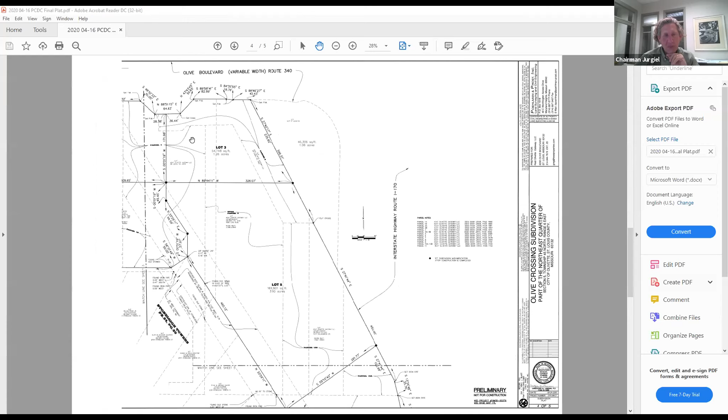So we'll move on to reports. Alright, a couple of items to report, and I had an agenda thing, I think I closed it. So I'm going to just kind of wing this.

We have our next scheduled meetings in June, of course. Please keep me posted on those dates. I know Mr. Lewis had indicated he did have a conflict on there. It's always good to know in advance so we can coordinate with the petitioners in doing so. I'll quickly go over the July schedule also in that process, so if you bear with me here. Our next scheduled meetings are June 3rd and June 17th.

For the meeting on the 17th, we have 3 new houses that we're doing reviews for, 2 on Collingwood and 1 on Forsythia. And then there's an addition and a pool that are also pending reviews. I think the addition is going to require the Board of Adjustment, but we're still trying to figure the specifics out. And then of course we have that commercial addition that we deferred from our meeting. Council will be meeting for their work session June 1st, regular meetings on June 8th and June 22nd. The items going before the commission, their first meeting next week, is the vacation plat for that segment of Birdie Lane off of Old Bonhomme Road.